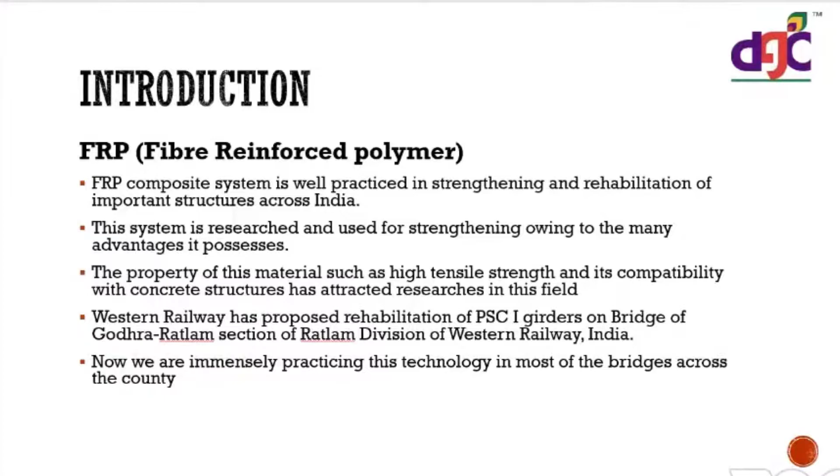What is the drive for this research? So that the complete strength of the FRP is not being wasted in retrofitting of structures. The tensile property attracted the researchers and the applicators in this particular field.

In this direction, we always believe there is a need. So the technologies that we have developed are pre-stressing of laminates by pre-stress machine and carbon anchor application, triple laminate stressing technology, band stressing methods, and application of Groove laminates.

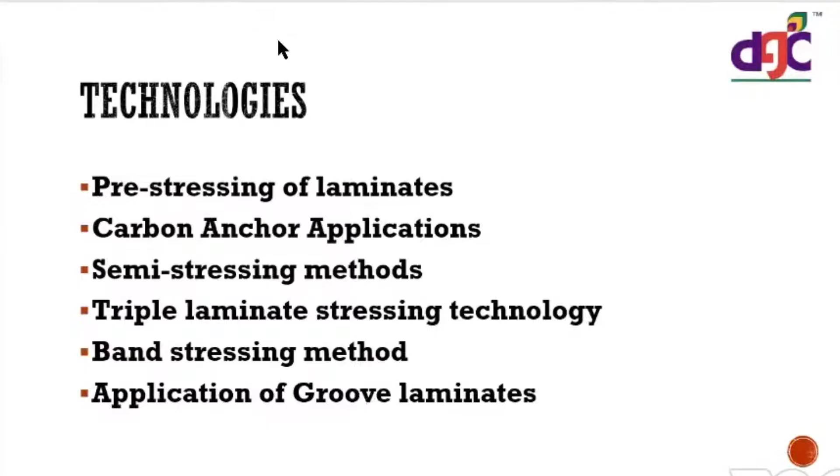I would like to discuss one by one. So definitely the pre-stressing has advantages like making the system active, and comparatively higher strength of CFRP is used since we use a strain in the laminate, and it creates some reversal moment in the structural member, which counteracts the effects of the initial loadings.

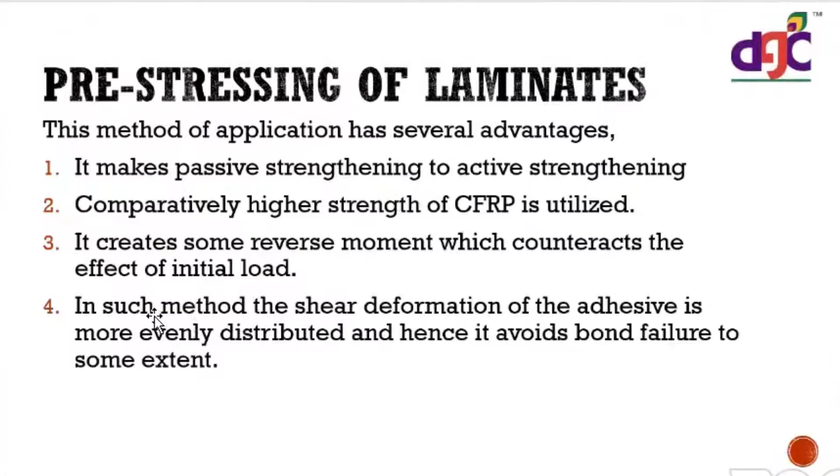The load is more evenly distributed, and hence it avoids the bond failure to some extent. So these are the components of the pre-stressing machine: this is the cylinder body, these are the anchor plates which we finally place at the ends, and this is the machine setup.

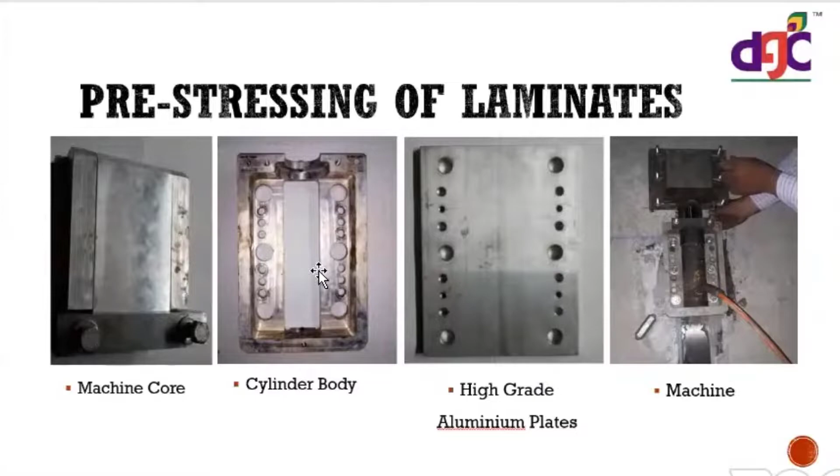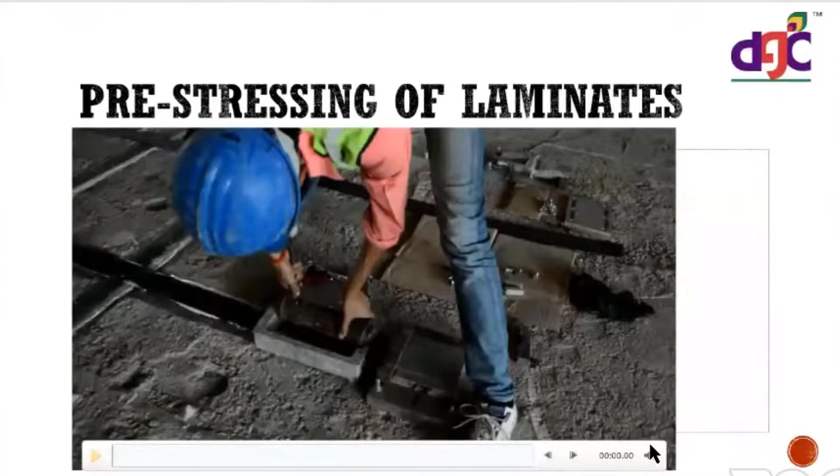So where the pre-stressing technology is being used, I would like to show this video. The machine has got two ends, one fixed and the other movable. The cylinder body is placed at the movable end, which accommodates the jack. While loading, this movable part will move backside, and it induces a design strain in the CFRP laminate.

There is another technology which we have developed: semi-stressing of laminates. This stressing method is applicable where there is no requirement of reversal moments. We could make the system active without much complexity, and this is fast in application and easy to handle as well.

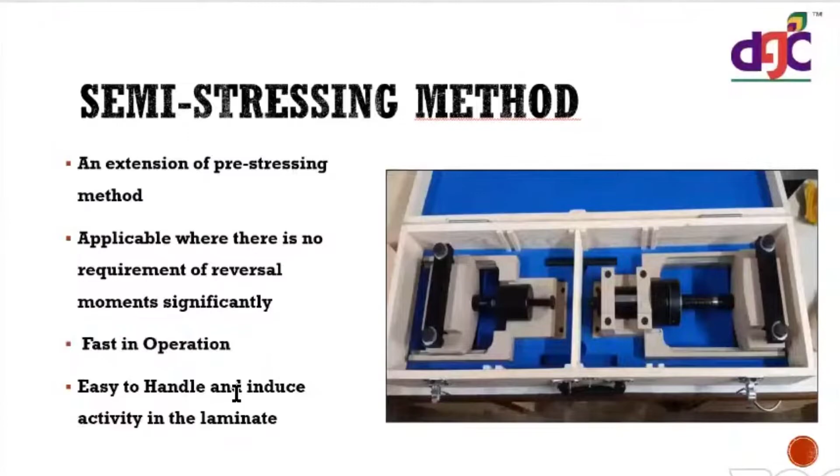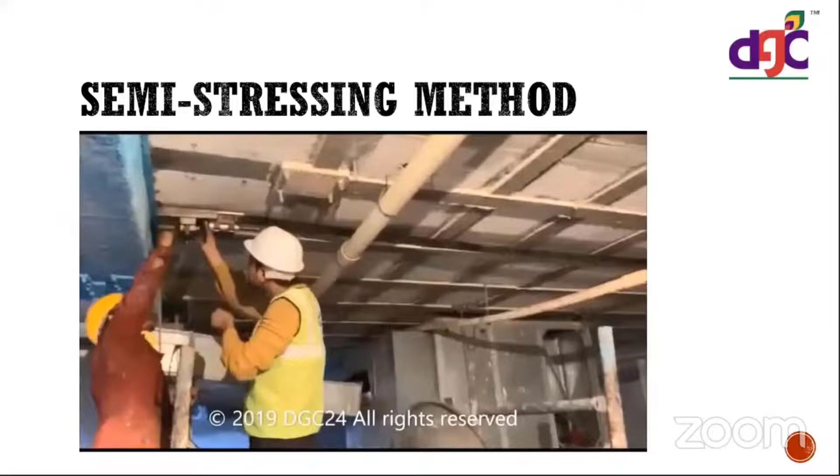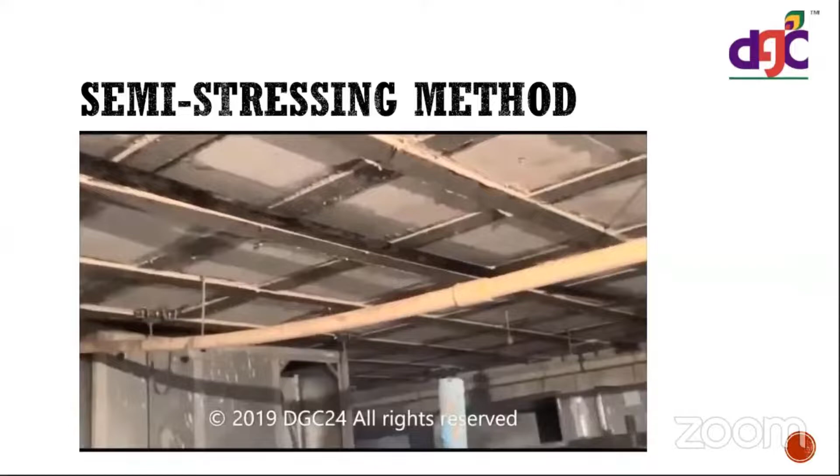One fixed end and the other mobile end. In this technology, we induce about 400 to 500 kgs of stress in the laminate, and we make that active. So this is a completely manually operable machine.

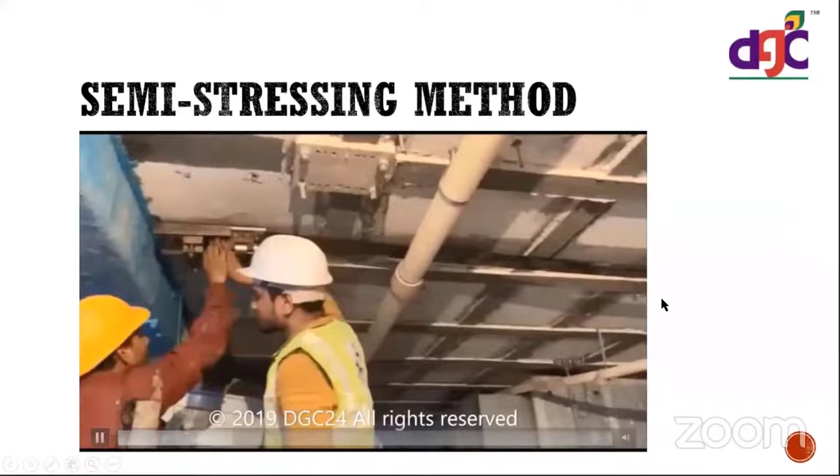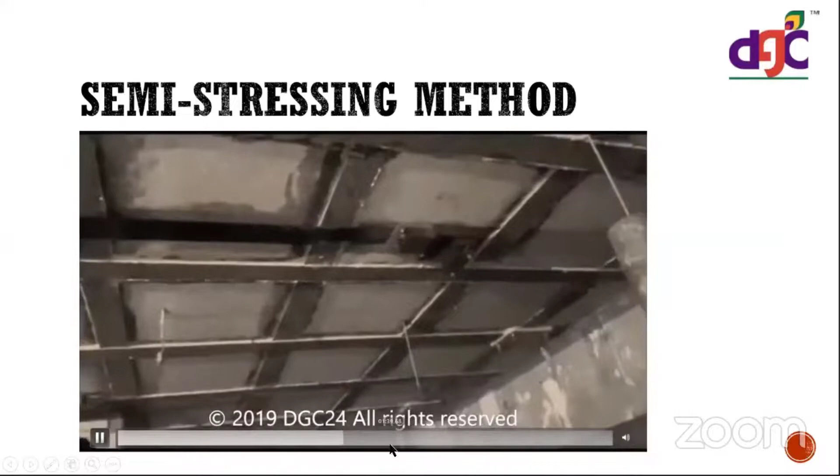Using this technology in strengthening of slabs, flat slabs, and PT slabs.

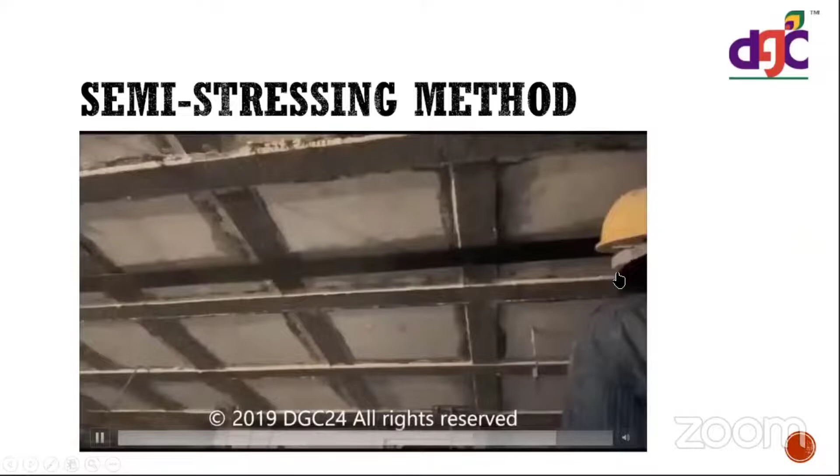Let's go into one more technology called the band stressing method. We generally know that columns are confined by CFRP sheet. This technology gives us the provision to stress the confinement, stressing the bands that are used for the confinement, which increases the confinement property in the column.

There are other advantages as well. If we are treating a crack section, there will be reduced deflections and reduced stresses, and it definitely participates in improving the structural behavior.

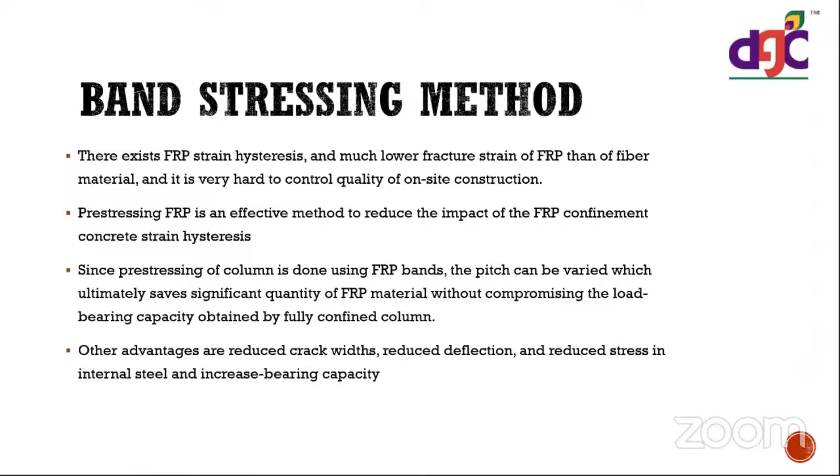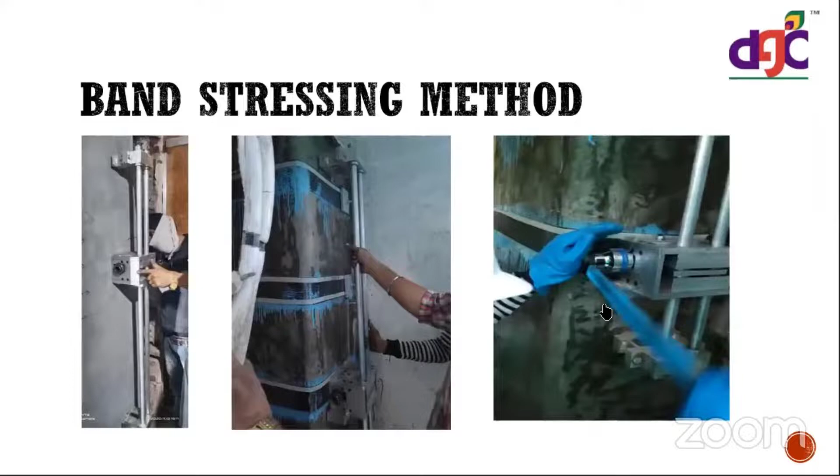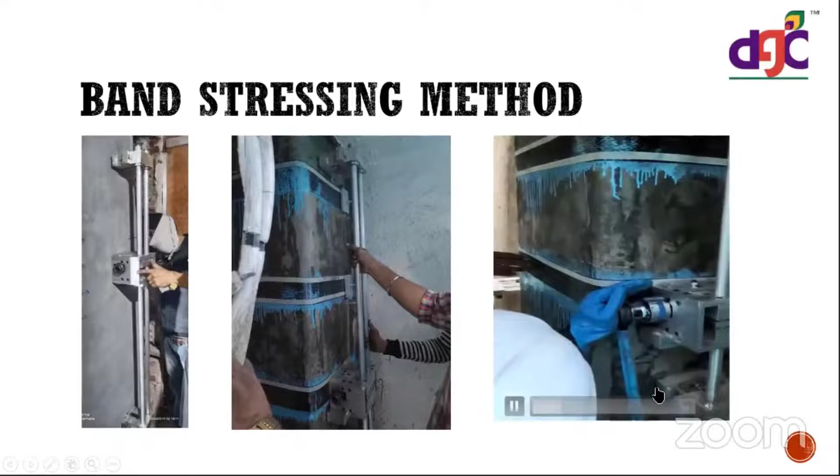Some of the photographs where band stressing is being used, and this is one of the videos showing how the stressing of the CFRP bands is done. It is applied to the overlay first, and then the CFRP bands are placed and they are stretched.

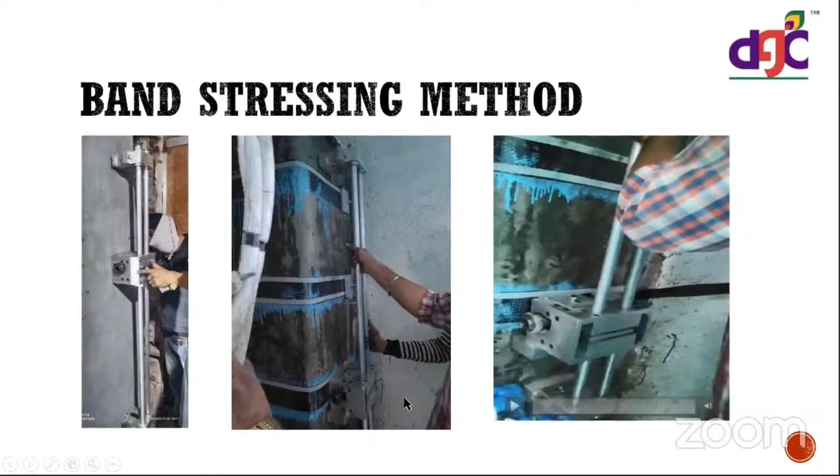Apart from this, we have one more machine where three laminates can be stressed in one shot. This is applied where there is a limitation of girder width and time of operation, generally in railway bridges, where we get limited block time for the strengthening work. It is very fast in operation since we are doing three laminates stressing at a time.

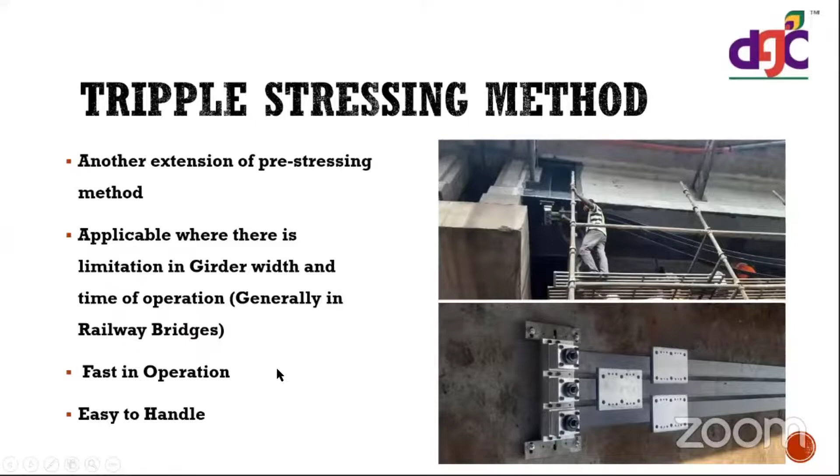Very easy to handle. So these are the setups showing the triple stressing of laminates.

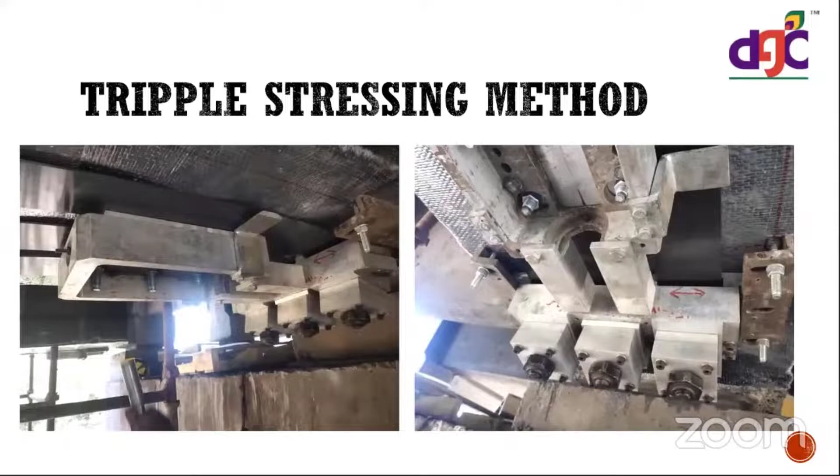This application we have been practicing for almost a decade, where groove laminates are inserted inside the column, generally where the columns are being subjected to tensile forces. This is one of the projects, a bowstring bridge, using these NSM FRPs, groove laminates. These laminates are anchored at their ends for a better anchorage system.

Very much valued where there is a space constraint.

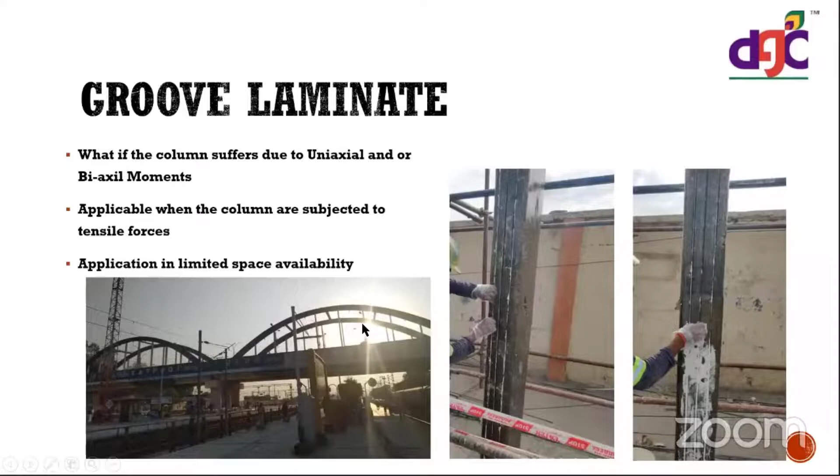This is one of the systems that we have introduced - carbon fiber anchors, to integrate the core concrete with an FRP overlay. Basically, we drill a hole, make a provision, apply this CFRP laminate, insert these anchors inside the concrete, and spread the threads across in a set. This actually integrates the FRP system to the core concrete, and also helps with debonding strains.

The design, when we consider a debonding strain, this gives little allowance in considering a high value of debonding strain. So, also when the aspect ratios are high, this has been very effective as well.

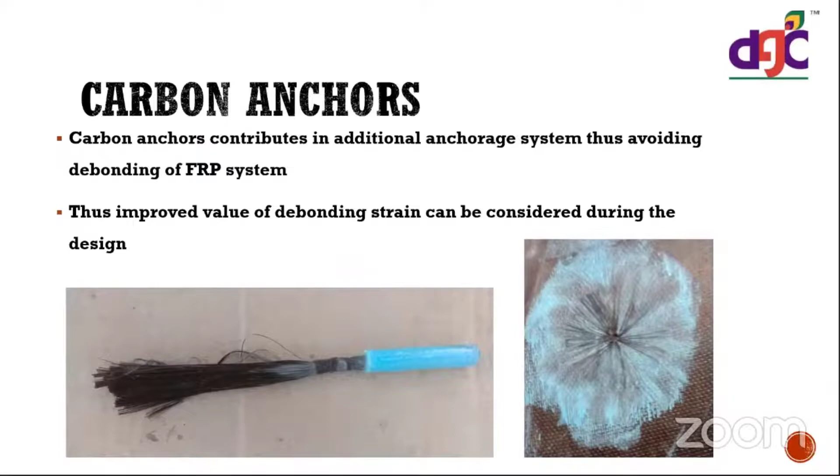So these are some of the codal references which effectively speak about the retrofitting of flexural members.

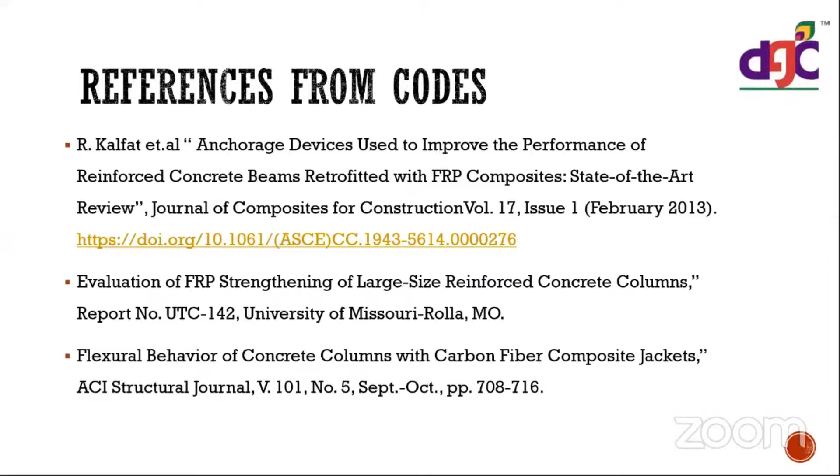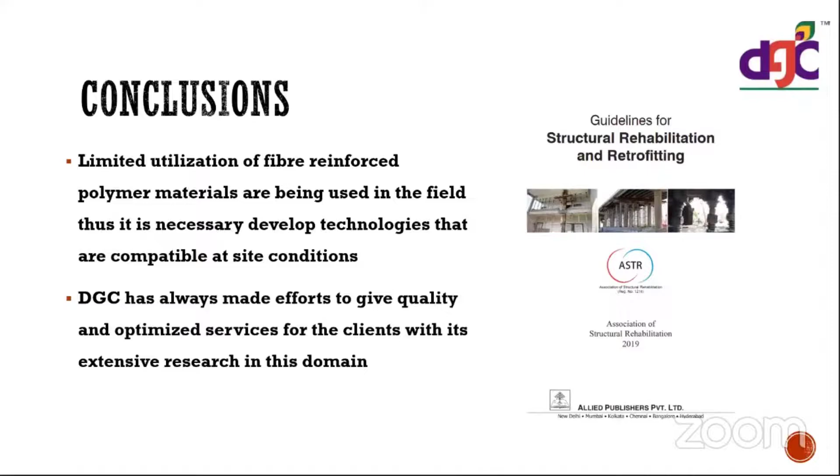And lastly, I would also like to say the technologies that we have developed are being replicated in ASTR guidelines as well, which we are really proud of.

How responsible are design and construction - mind you, not only construction but also design practices - for the large number of present day failures?

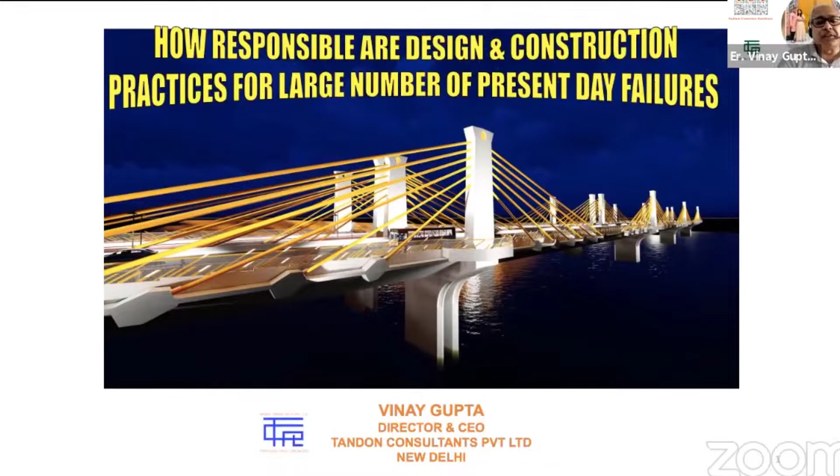There can be many reasons. For example, lack of understanding of the codes of practice by the designers - this has been found to be a reason.

Underestimating the construction loadings, because those loadings are supposed to be accounted for in the bridge design - nothing should exceed what's designed for. If it does, it has to be accounted for. For example, your bridge may be designed for the permanent loadings, service stage loadings, but if there is any construction loading, such as a launching girder weight, which makes the structure more severe at a certain location, then the structure must be designed for it, even though it happens only once.

Improper construction sequence - the sequence of loading or sequence of construction has to match the design, which I will show you with some examples of how sequence can affect the designs.

Inadequate quality control, we always talk about it. And improper control of documents, which means the owner or client has issued drawings at revision R6, but construction is happening with revision R5 or R4. Then something is bound to go wrong.

Why? Because the procedure to mark old drawings superseded, marking every print superseded, was not followed. In ISO documentation, there's a procedure that says when you issue copies or drawings, you have to count the numbers and document that so many prints have been issued. Then once it is updated, the older ones, each with a given number, should be marked obsolete.

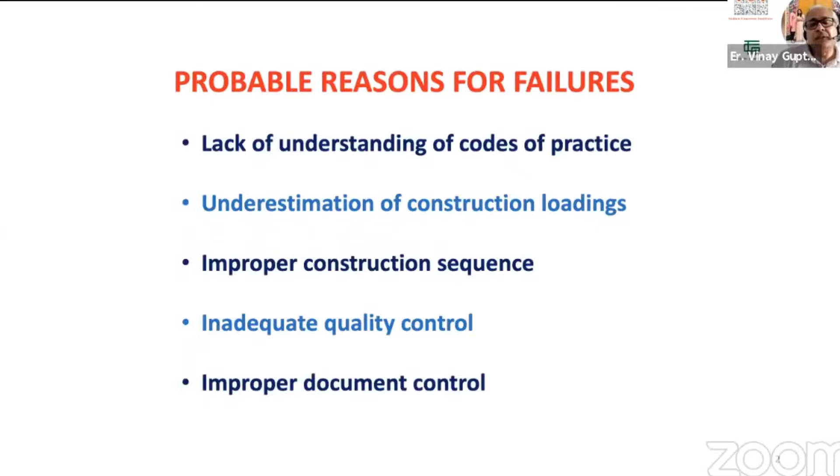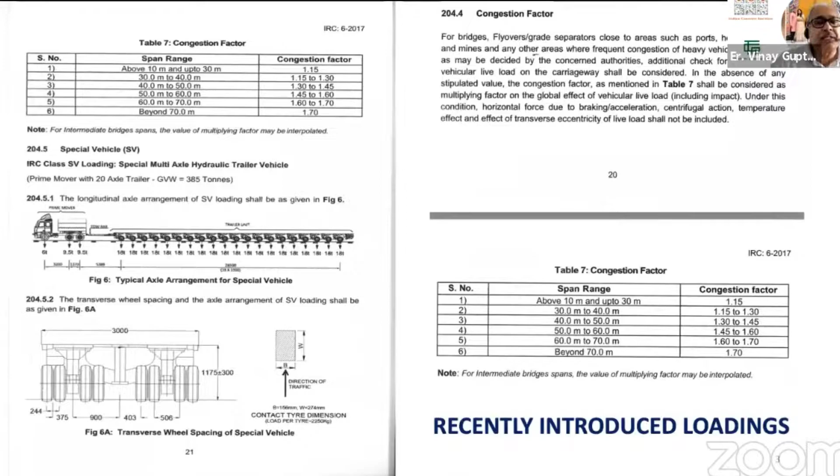Talking of the first topic, that is loadings - new loadings have come in IRC 6, in 2017, where there is a special vehicle load, as you see on the left side, and a vehicle congestion factor. We can debate as to why and how, but these loadings may not be known to designers at times if they are not aware of the latest codes.

Or if we see IRC SP 65, which is for segmental bridges, it was first prepared in 2005 and now modified to limit state method in 2018. This may or may not be known - I have recently seen an example where people didn't follow this code at all for a segmental bridge.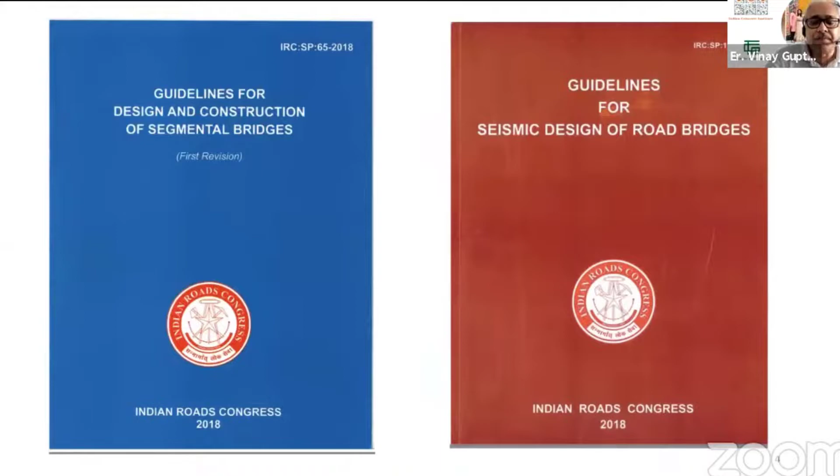Seismic design of bridges - there's a new guideline altogether which replaces the provisions of IRC 6, that is IRC SP 114, which has to be compulsorily followed for new bridges. So people may or may not be aware of that - that's my point.

Okay, let's look at some examples of what can go wrong, because I have to be short and try to finish by 6 o'clock my time.

Here you see this diaphragm, the pier diaphragm at the end of a box girder - it is so very important from the design point of view. It may look like a very simple, very deep beam kind of a thing, but it carries the entire span on it, the entire weight of 500 to 2,000 tons. So where it supports, or rather where it's supported on the bearing, is very important.

Where it gets supported during the construction stages on temporary stools, or where it gets supported during replacement of bearings on a temporary jack - every condition affects the design of the diaphragm. And if there's a cutout like this for access, it makes it even worse.

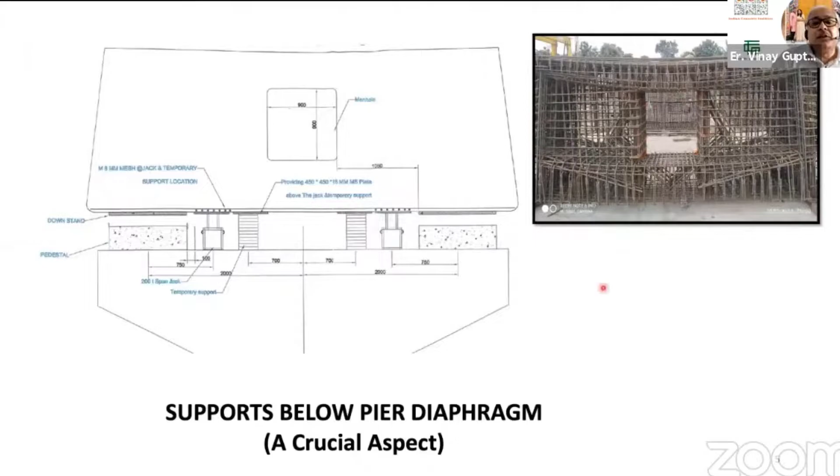So I will show you an example where you have a diaphragm that looks something like this here - let me switch the presenter pointer option to laser pointer. So this kind of opening that we have, I will show you some pictures as to how it has created so many problems in many spans.

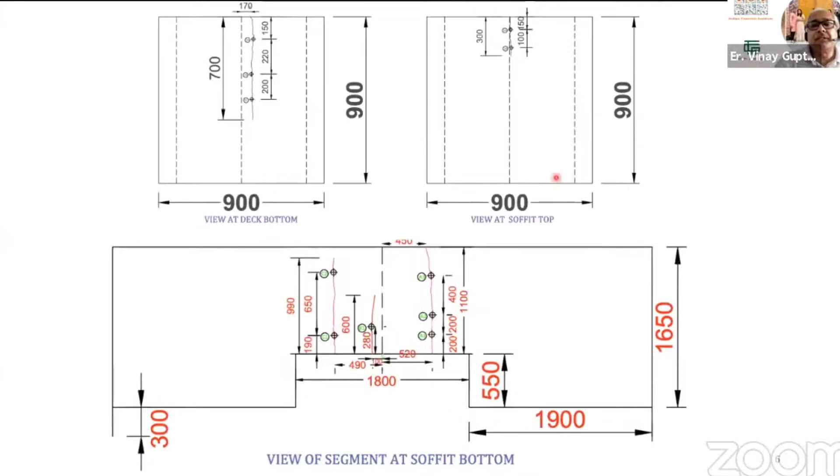Now, what can go wrong? Let us see. One possibility can be that you pre-stress the girder alone first after the wet joint is concreted and the concrete gains strength. In which case, the pre-stressing would be imparting its stresses or its forces only onto the girder section, and the slab comes later.

The other condition can be that you first cast all these wet joints and the deck slab. Until that time, it rests on the same support at the bottom. And now you pre-stress, wherein the pre-stress is applied to the composite section, including the slab. The behavior is absolutely different. Design has to match what site will do, and site has to match what design has presumed.

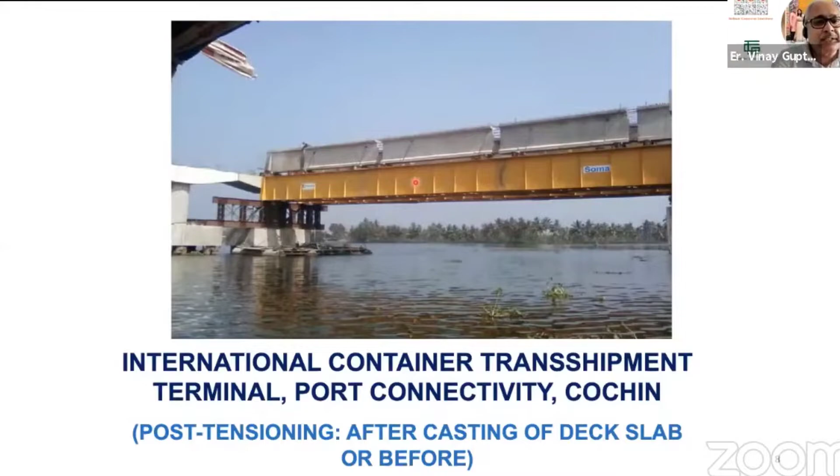Stability has become a very difficult and very frequent problem in our country over the last several years, including today, in that when you place a precast girder - pre-tension or post-tension, doesn't matter - it has a span anywhere around 20 to 50 meters, and a height anywhere around 1.5 to 3 meters.

This girder by itself is fairly unstable, but not theoretically unstable. If it's placed on the proper supports here and here, it is not theoretically unstable, but still stability arrangements have to be provided, because there have been umpteen number of cases where girders have fallen down - even 3 days ago, some cases took place like that.

So now over the next 7 days, 10 days, 2 months, 5 months, 6 months - whatever time it takes for the top deck slab to come - these two sets of bracings along with the horizontal rebars connected are stabilizing the entire arrangement of 5 girders.

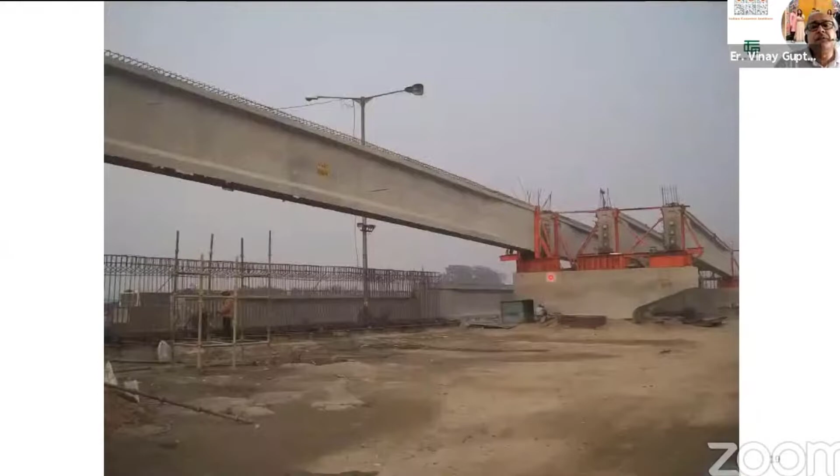One can also see another example here. This is from a different project in Delhi, where girders are stabilized in a fantastic manner. Each girder independently is connected to the pier with fasteners below, or with anchor bolts, before the next girder is placed, and of course the other girders are placed.

Now I have seen an example where these things were provided, but these bracings were missing. The pier cap was covering the entire set - this is an accident that took place about, I think, 2 years ago. I had visited the site.

Pier cap covered all the girders, and there were five girders, parallel. The central girder was supposed to have a pot bearing which would be transversely fixed, and they were placed directly on the pot bearings, therefore no question of temporary stool or anything. These two outer girders on left and outer two on the right would have transversely free bearing, which means the central girder would have transversely restrained bearing, while the outer two on either side will have transversely free bearings.

Now what these people did, unfortunately, they connected girder number 1 and 2, they connected girder number 4 and 5, but they did not connect girder number 3, which is the one having transverse stability with the fixed or restrained bearing transversely.

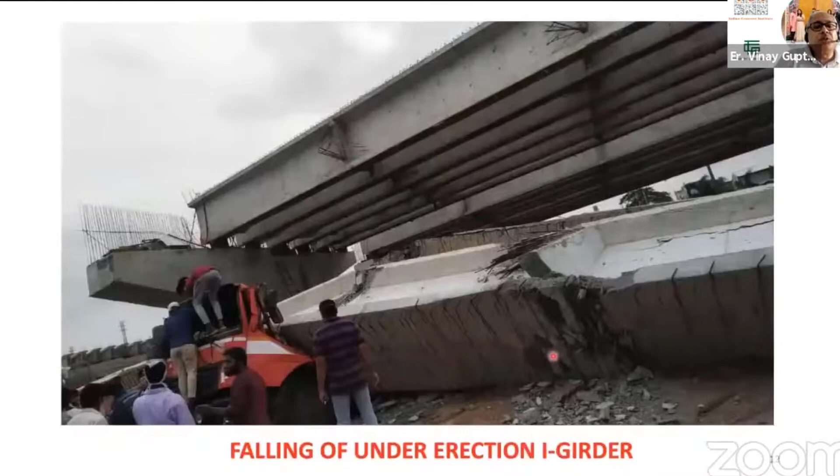All right, so now we go to another example where a flyover has fallen down for a very different reason, as it is surfacing today, which is that the temporary supports are not permanent bearings. These are temporary supports below the girders, but each support, which is supposed to be at least a metallic stool or a wooden single wedge, is really comprising of several wooden pieces to form it, and wooden pieces can tilt, and when they tilt, the girder tilts, and when the girder tilts, it falls.

And why it falls is that if the girder has just tilted and come onto the pier cap - the girder has a span, in this case about 30-40 meters - the girder's major axis goes horizontal, whereas the minor axis becomes acting in the vertical direction. So the entire weight of the 30-40 meter span is coming in the vertical direction where it doesn't have the moment of inertia, the Z or the lever arm. Therefore the girder, the moment it tilts 90 degrees, it has to crack, and once it cracks, it has to really fail and fall. Which is somewhat like what has happened here.

There's one more picture. These are all consequences - there's a truck below, or a car below, there are deaths and accidents, all of those things. But the reason was something you need to know. So today our idea is to know what all can happen, why it can happen, and there are various possibilities. It's sometimes very difficult to even know what the reasons are.

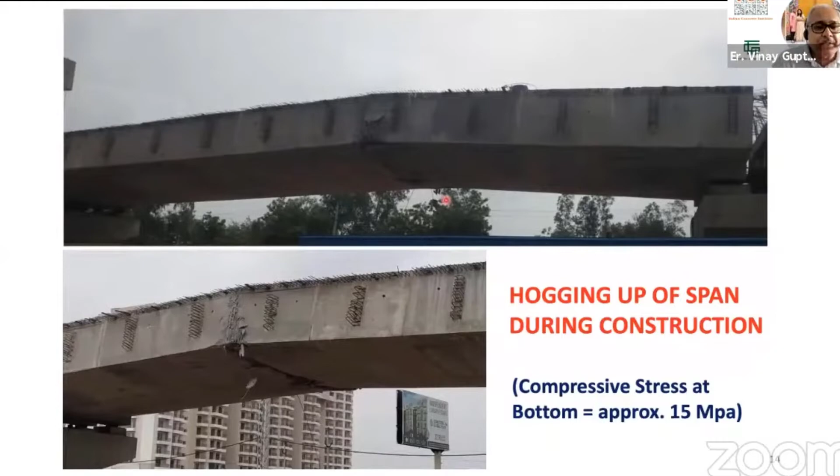So this picture shows very clearly that the top concrete is somewhat better, the bottom concrete is poorer. This happens majorly because, one of the common reasons, at the bottom you have several pre-stressing ducts, and these ducts may be as much as 100 to 150 millimeters in size. The concrete sometimes may not reach below these ducts. You may see the concrete at the surface good enough, clear enough, but inside the ducts, or in between the ducts, the concrete may not be properly reaching.

There may be voids unless you carry out a proper UPV, that is ultrasonic pulse velocity test. You will not know that there are honeycombs inside. Outside is all intact, you don't see any problems. Only when you stress it, you get this kind of a problem, and this has happened.

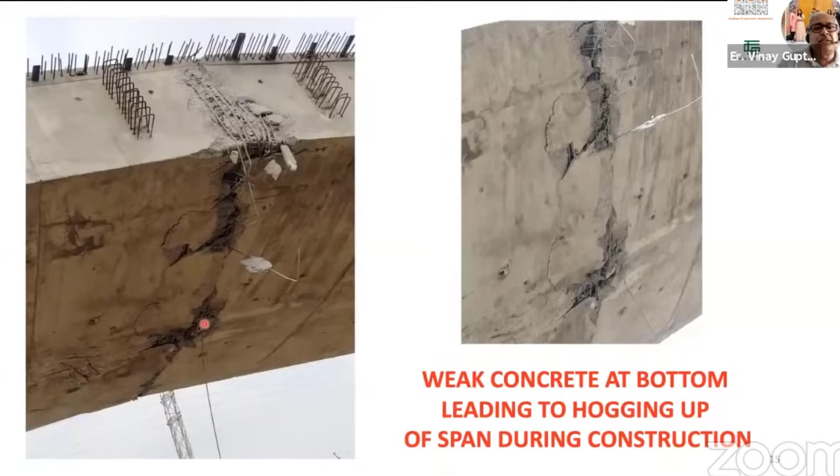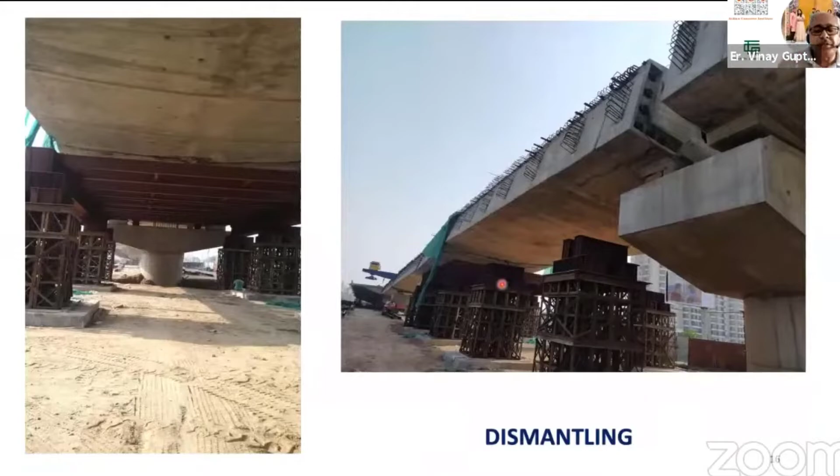There's a process, and now you have to take out these segments. So whatever you did for launching the segments or the launching girder, now you back move everything, undo everything, take the launching girder back, connect all the segments back again, and then saw cut the segments and start lowering them to remove.

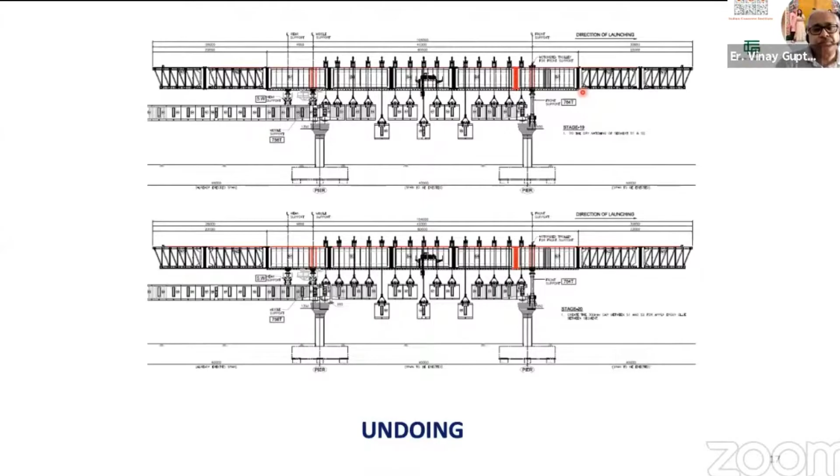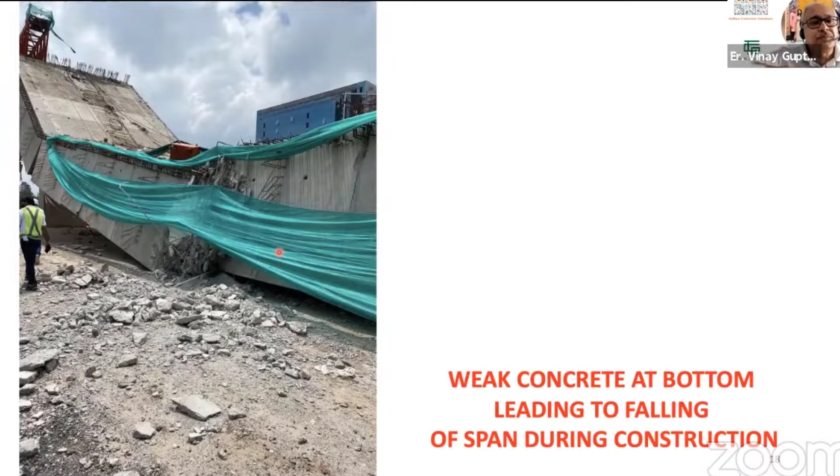Another case, very similar. The bottom was very weak. Bottom being very weak, what happened? It was extremely weak, so it may have slightly hogged up, but since the whole thing was so weak, finally it fell down. So this became a worst case where the span actually came down to the ground.

There's another example in Mexico. They say it's the worst disaster in the previous 50 years of a metro project. The girder slab has fallen so badly, like this. They're also investigating the errors, whether they were design or construction, or they think it is both.

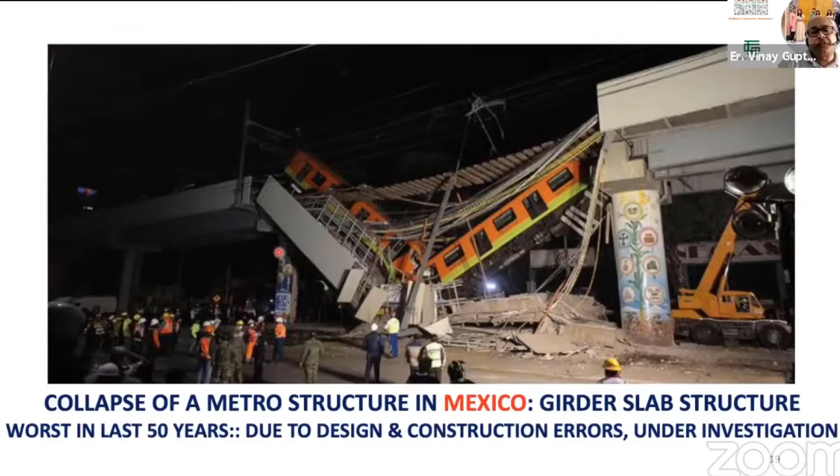One more thing we have seen happening at places is epoxy application. Between the two segments there is an epoxy. Looks very neat, but do you see epoxy? I don't see epoxy. It should not be as neat. As per the codal stipulation, you're supposed to apply 1 mm epoxy on both surfaces, and after you apply the temporary pre-stress, it should become nearly half of it after application of the pre-stress.

How will it become half? Some will go on the other surface, some excess epoxy will come on this surface. It looks something like this. If you see, it's looking dirtier - that's what we want it to look like. And thereafter you scrape it out and remove the excess epoxy so that it looks neater. But it should not look neat right in the beginning when you do temporary pre-stressing at the site.

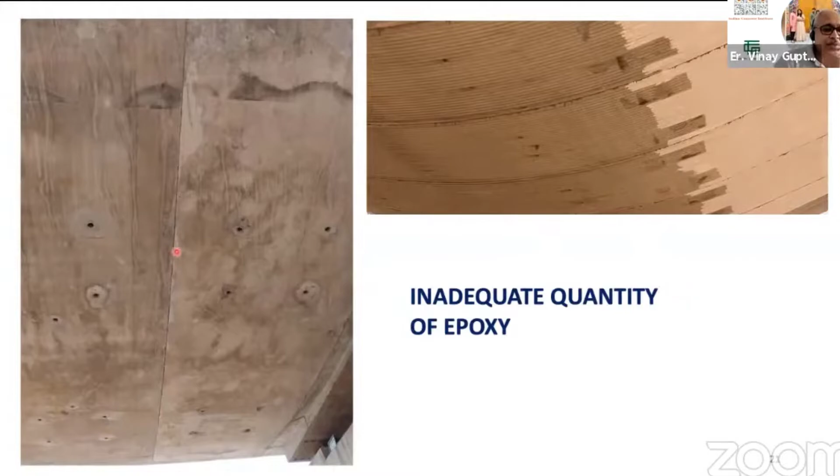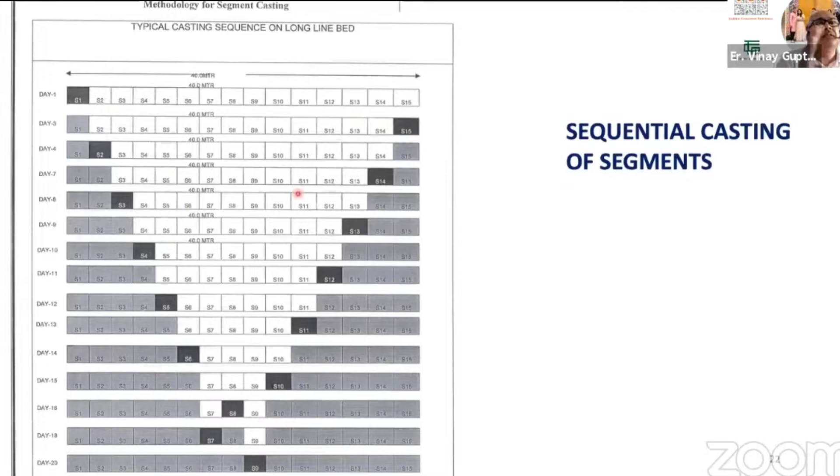Okay, come to the match casting, or casting of segments. Segments are cast by match casting technique, wherein you cast one segment, then cast the next segment against it, and there's a complete matching of the surfaces. You may cast 1, 2, 3 like that, or 15, 14, 13 like that, or you may do 1, 3, 5, 7, and then fill in between by match casting.

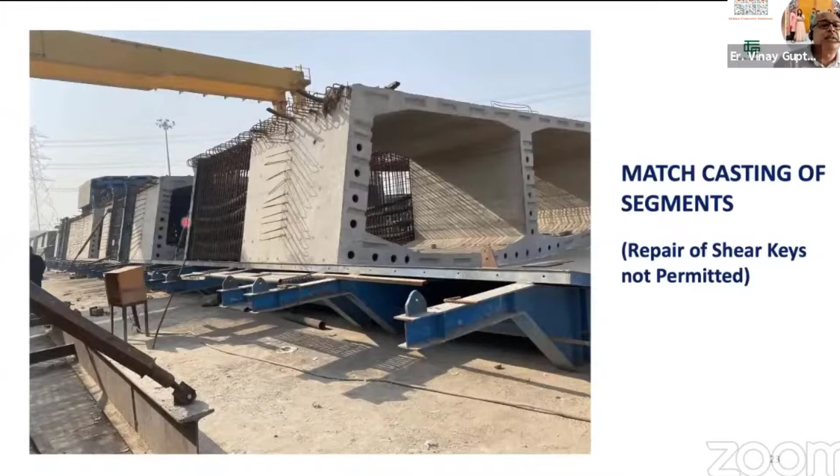But what is important is whatever match casting you do - like this one is a 1, 3, 5 type of condition - first you put a bulkhead here, put a bulkhead there, and cast these segments. We put a bulkhead here and a bulkhead there and cast these segments. And in between the two, we cast a segment directly against the surface with a separator, or bond breaker.

Each segment must be given a unique identification number. Unique meaning for which span it is, which segment is on the left side of it, which segment is on the right side of it. You cannot use a segment of one span in another span, because it has to match with the same segment against which it was cast. That is fineness.

And the other important thing, of course, in the design, to take care of the during-construction condition, is where the segment has to be lifted from. At times, at this location, you get some bending moments which are different from what you get in the service condition, and you need a special design for this.

Many times you must have noticed that segments are lifted from cantilever wings or cantilever flange slab. When that happens, you have tension at the bottom during lifting, and for that tension you have to provide reinforcement at the bottom of the cantilever slab, which otherwise is not required in the service condition. So the designer has to know that he has to cater to the construction conditions fully in his design.

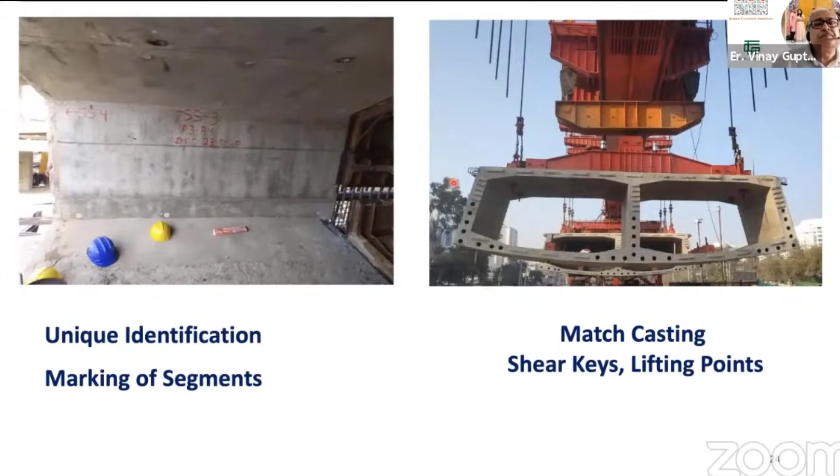Once it breathes, the structure has to expand or contract, come what may. Finally, the bearings will tend to fail, and we don't want this to happen. I can understand why somebody would have done this - they want the longitudinal force due to earthquake and braking to be shared by two sets of bearings and not one. But the repercussions are that during movements, the bearings will fail because they cannot move. They are both longitudinally fixed and the structure has to breathe. So either bearings will fail or the structure will show a lot of cracks.

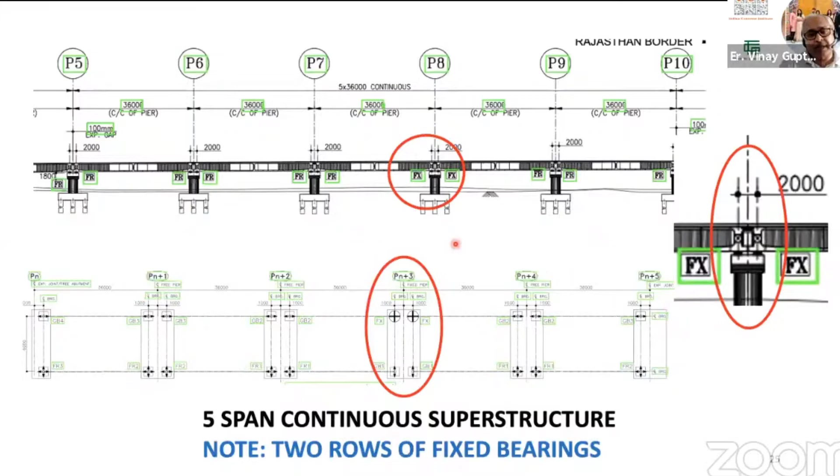The other causes again are coming from experience. Bearings have been placed upside down in certain cases. Since they are doing a large number of spans, long viaducts, they forgot to take care that certain bearings have gone upside down. If you have a pot bearing, the bottom plate that's supposed to be at the bottom goes to the top, and vice versa. Sometimes, especially in guided bearings, they've forgotten which direction the bearing has to be placed in terms of plan, and they have rotated 90 degrees in plan.

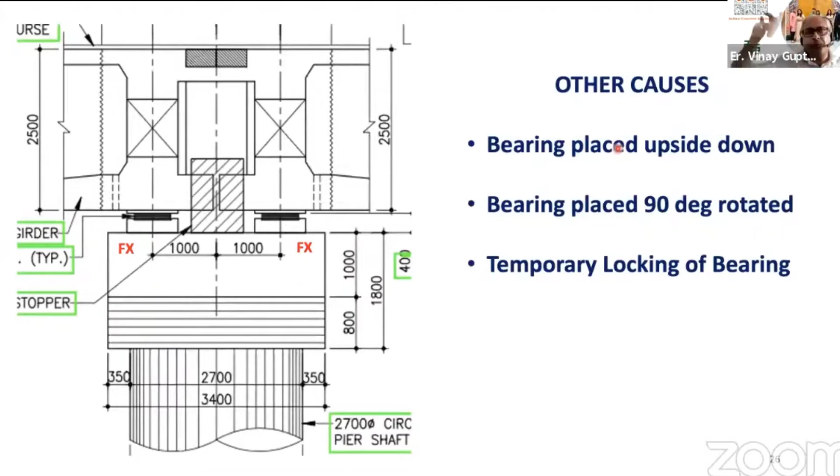The other problem one has seen at times is that the structure, temporarily before it is made continuous and the fixed bearing starts acting for the entire structure, is not temporarily locked against longitudinal movements. We usually design a temporary lock for 5% of the vertical load, so that in case an earthquake takes place or something else happens, the structure is not free - it is connected to the bearing, to the substructure. The lock will be released only after the structure is fully connected to the fixed bearing, at least at one place.

Another type of failure again is coming from experience, and Mr. Jatkar is well aware, he's with us, and I think Mr. Hegde as well, and of course many others - many times the segmental structures are constructed using ground supported staging. No issue, it will be slow, but no other problem. But the ground is being used by the public, remember. You have to control that public so that they don't spoil your supports. Otherwise, this can happen.

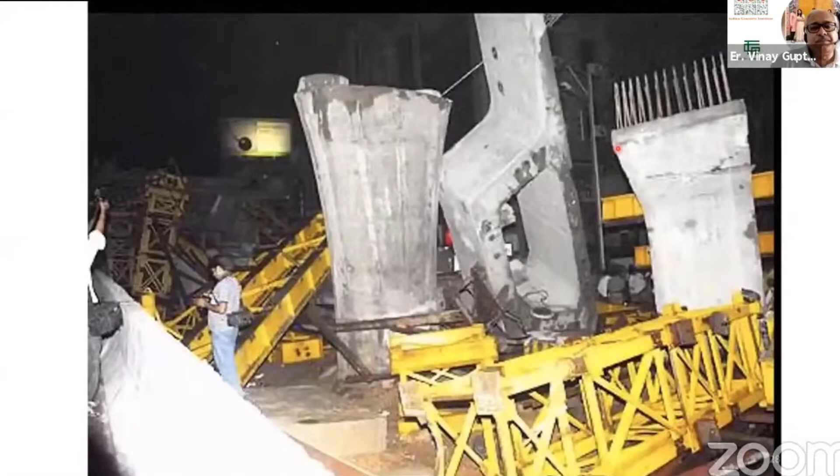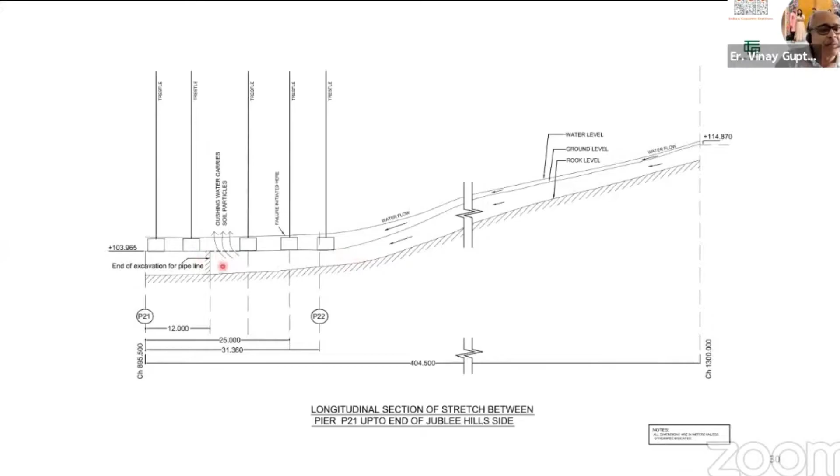Now, the reasons. The place I'm talking about has a slope of 11 meters over a short distance - the right side of the picture is 11 meters higher than the left side. All the supports that you saw just now are there at the lower level. That's all fine, but one work of laying the pipeline for water, 1 meter in diameter, was going on. Those pipelines were laid from the upper level every day, proceeding certain meters towards the lower level. The workers, when they go back in the evening, are supposed to close the end of the pipe so that the water from the higher level does not travel in the pipe and go below - which is exactly what happened. They didn't close it. There was a heavy downpour, the water came underneath these temporary trestle foundations, undermined it, the trestles tilted, and the whole structure fell.

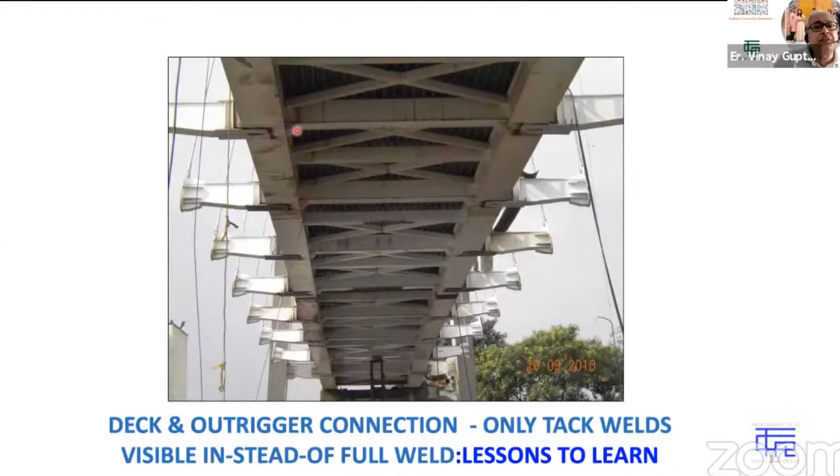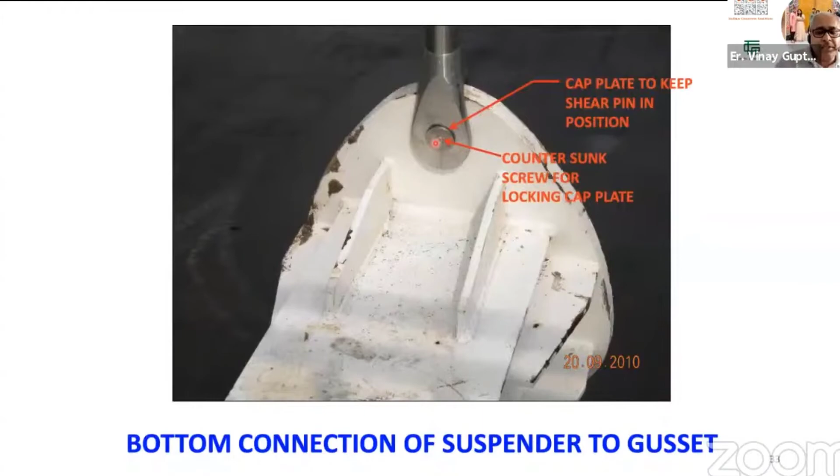Another kind of problem - this is a simple foot over bridge. I should finish in 5 minutes, I hope I can. This foot over bridge has outriggers connected to vertical suspenders in stainless steel. An accident has taken place - this is, I think, well known to many people. What is important here, apart from other things, is that this connection of the vertical suspenders to the metallic structure must be made properly, because in this nut or bolt, the bolt has only half a thread extra. In case you go wrong in fully tightening the bolt into the nut, just by half a thread if you're away, then the whole thing can open out like this. All the forks open, and the structure comes down.

The other thing one has seen while designing foot over bridges, most people don't seem to take care of the fact that it has to be designed for vehicular collision. If a vehicle is running on the road and collides with the foundation, this part for a height of 1.5 plus another 1.5, 3 meters, should be safe against that vehicle collision force, which is in the range of 50 tons and 25 tons.

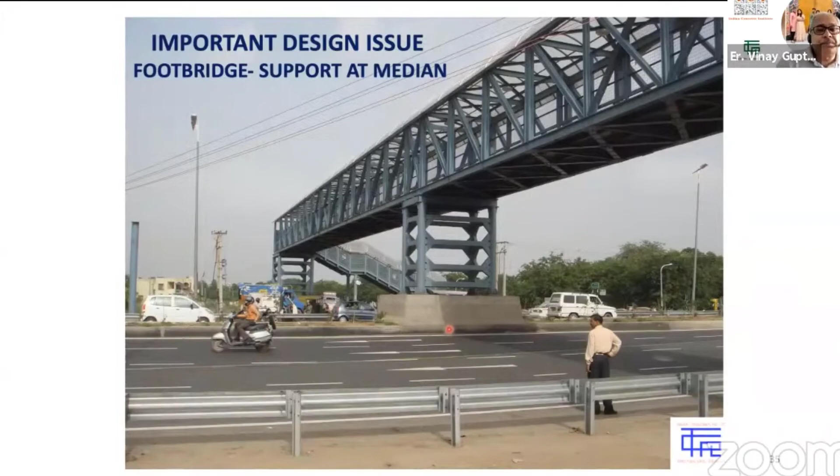Unless the foundation is 4.5 meters away from the curb, you're supposed to design it for that force, and I think most people tend to forget that. They end up providing a simple pipe of whatever half a meter diameter or some 600 mm, and they live with it. They forget that an accident can take place.

Look at another type of condition, which is there very well in IRC SP 66, but many people may not be aware. In a continuous bridge, when you have a fixed bearing - not fixed really, it's longitudinally free, transversely fixed, so it's a guided bearing - what should be the direction of placement of the bearing?

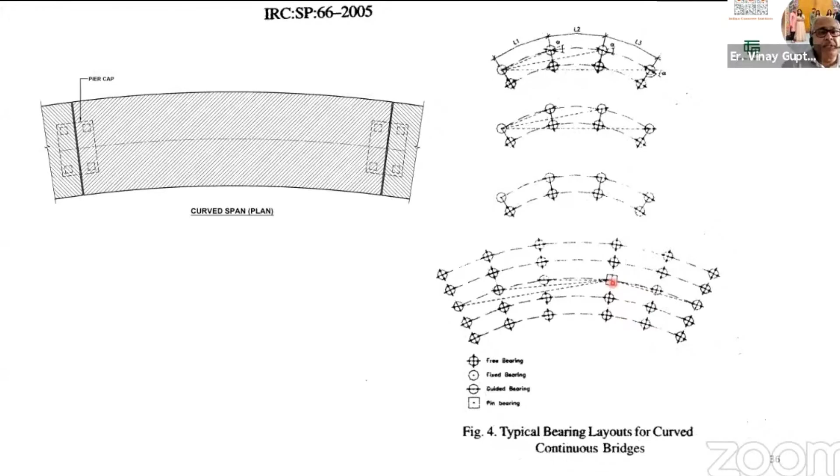This has been codified about 15, 16 years ago. Mr. Alok Bhowmick, I don't know if he is there, he prepared this code. All right, remediation - I'll go very fast, finish it in 3 minutes.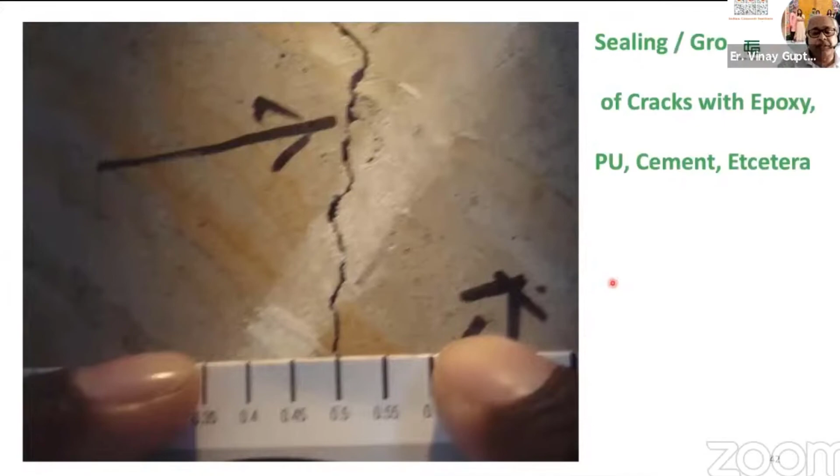We get cracks like this. If there are narrower cracks, we seal them with epoxy, or we seal them with polyurethane. If they are thicker cracks, wider than about 0.6, 0.7 millimeters, we can even grout them with cement. And if they're even wider cracks, we can do anything. But if they're less than 0.2 millimeters, just make a V groove and fill epoxy putty and nothing else, because no material under pressure will go inside.

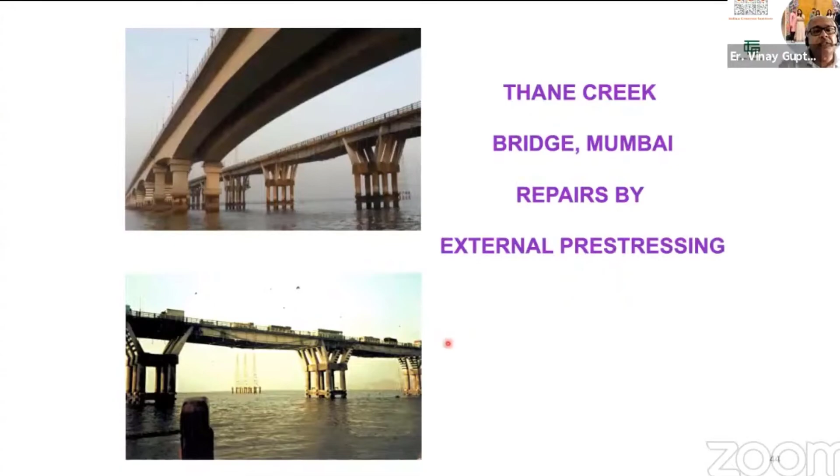The strengthening of a structure after failure or perceived failure can be metallic, non-metallic, external reinforcement, or external pre-stressing. A famous example is Thane Creek Bridge, where they used, apart from other repairs, external pre-stressing to strengthen the bridge, to retrofit it basically, which one can see the pre-stressing outside, and I think many people would have seen it. In the case of Sharavathi Bridge in Karnataka...

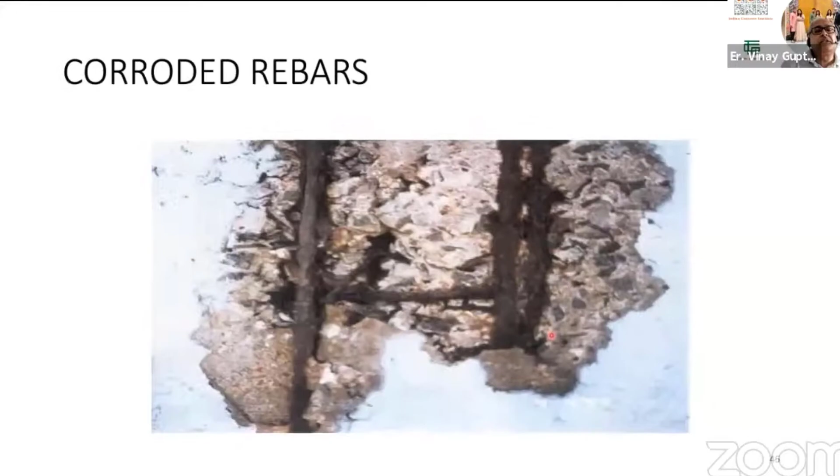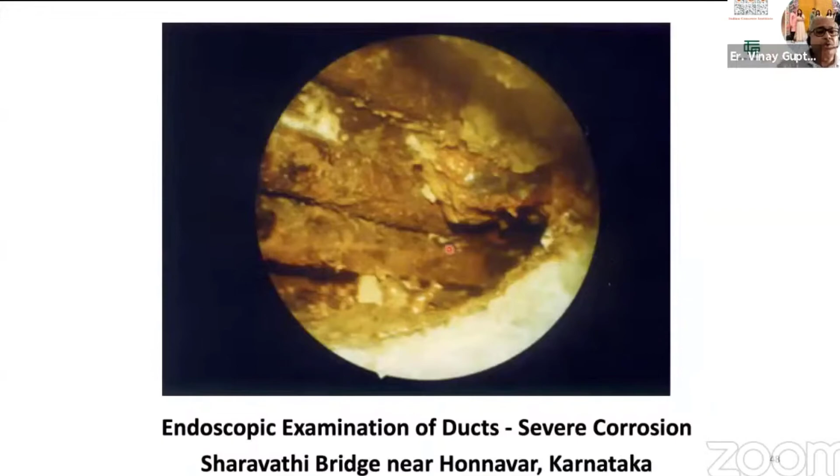This was a condition of the rebars. This was a condition of pre-stressing strands. It was so bad that even an endoscopic camera could go inside the ducts and take pictures. So they had to carry out similar things - first the crack sealing, then some patch-up mortars, and thereafter anti-corrosive stuff and external pre-stressing.

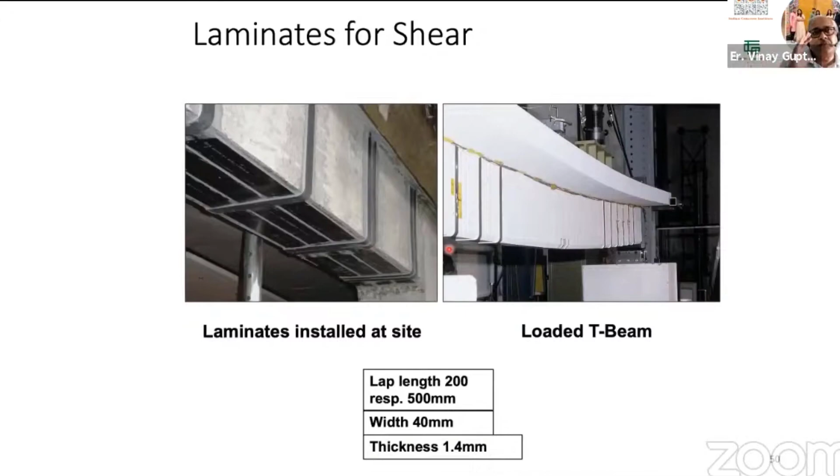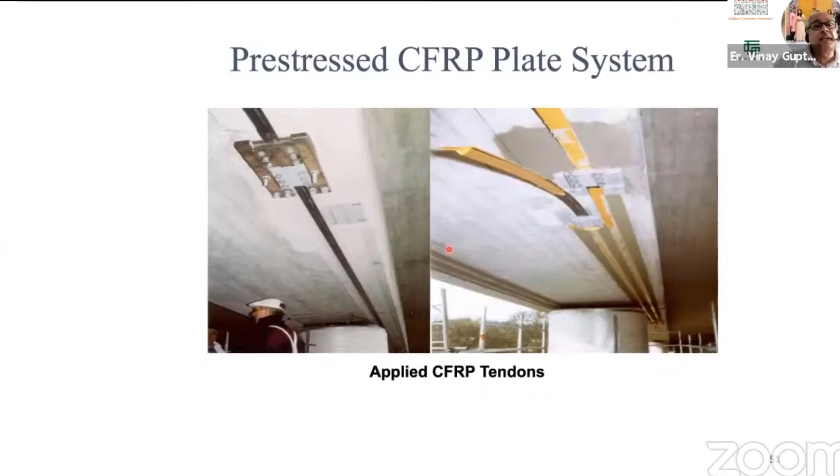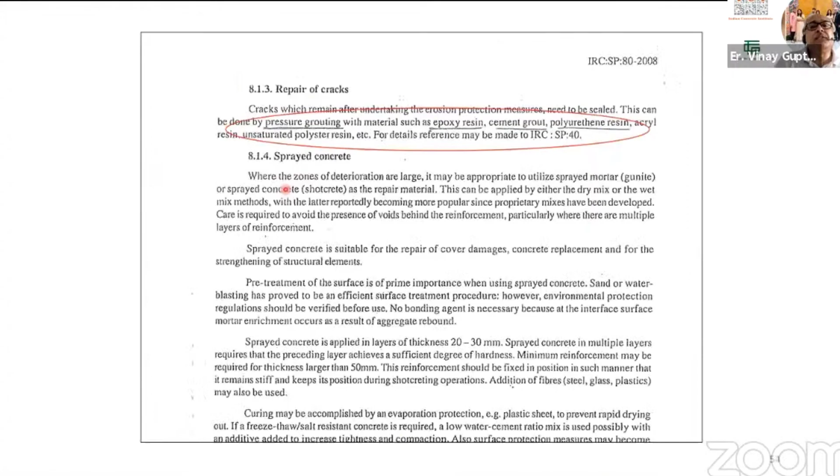This part, I think, has already been discussed by Mr. Chandar from DGC - that this kind of external non-metallic reinforcement, which can be pre-stressed or non-pre-stressed, can be provided either as a wrap type sheet or as a plate. All these things are very well covered, you're permitted to use these materials in IRC SP 40 and also SP 80. This is a pre-stressing jack that he showed, very similar. So these codes, SP 40, SP 80, do cover these advanced composite materials, which is basically carbon fiber polymer or glass fiber polymer.

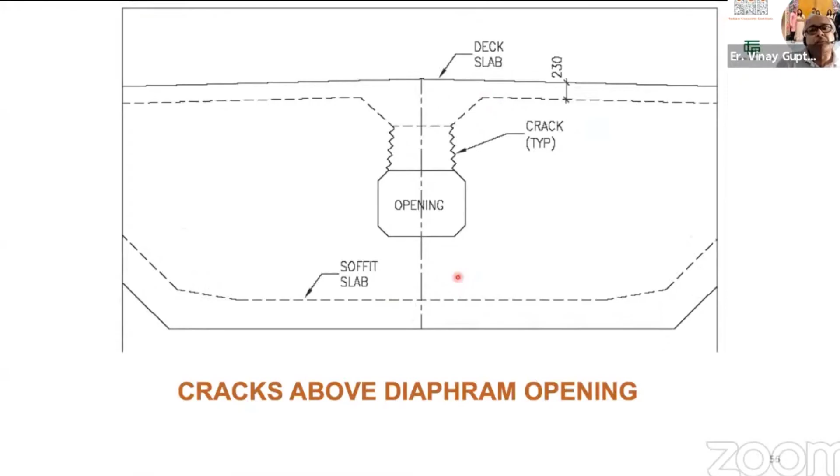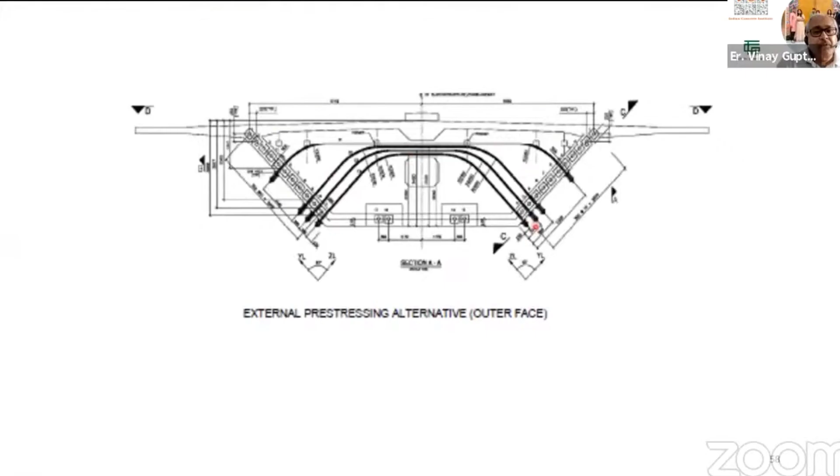In one case, we had this kind of cracks in the diaphragm over the opening, and cracks here also. So we decided to go for two schemes. One scheme was to provide external pre-stressing in metal on either side of the diaphragm. In the other case, we decided to do FRP, fiber reinforced polymer. And finally, they executed this FRP because it's thinner, lighter, easy to apply, but it's more expensive.

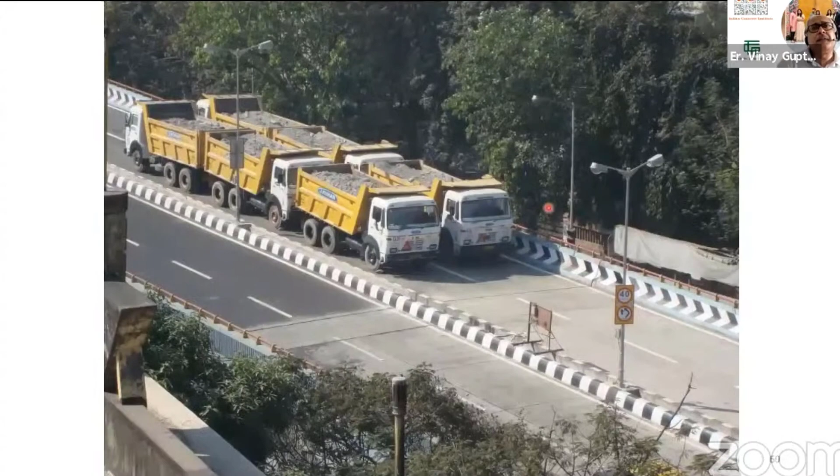But once you do any kind of repair or any kind of remediation, it's very good to load test the structure to see that at least it can take the vertical loads well as per the IRC.